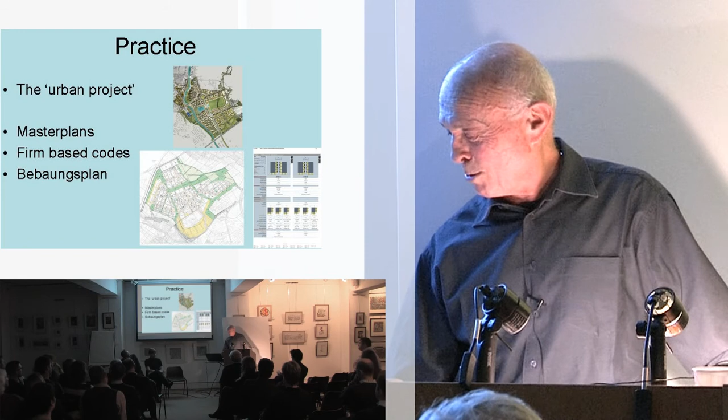But the way it works, what the urban designers do, it can be new cities—huge in the case of China, or very small in other cases. In China they're designing cities for 3 million people. Or urban extensions, as is the case in a lot of European countries, or regeneration, as is mostly the case here. Urban extensions here as well, but in most cases they are housing development, housing estates.

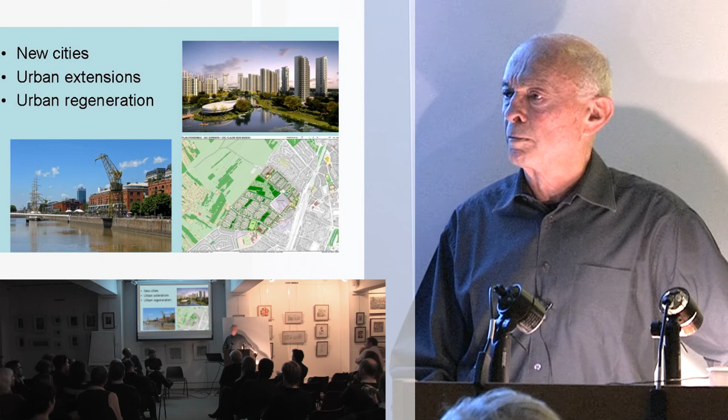So who are the clients of these schemes? That's quite interesting. In a lot of countries the client is international firms, and that applies to the Middle East, to Egypt, to Morocco, to China in some cases, India as well. Outside of Europe, certainly in South America, a lot of countries, it's international firms that want to develop huge developments, or large developments anyway. And they employ international urban designers, and they employ perhaps some of you—you get jobs in a number of countries, mostly in the Middle or Far East.

Then there's the local authorities. The local authorities mostly employ local people, but some do also invite through competitions, invite people from abroad. Certainly in Europe, because of European law, any tender has to be open to anybody in Europe. So you can get jobs from local authorities that have been advertised and have been obtained by British firms, as I know a few examples.

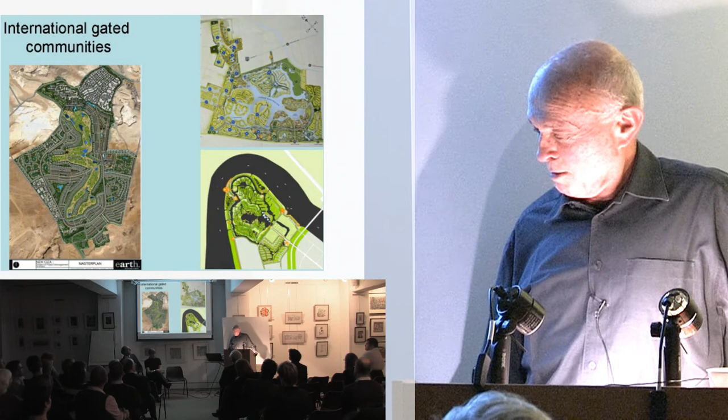But you have to ask yourselves whether that's the future, from all sorts of points of view.

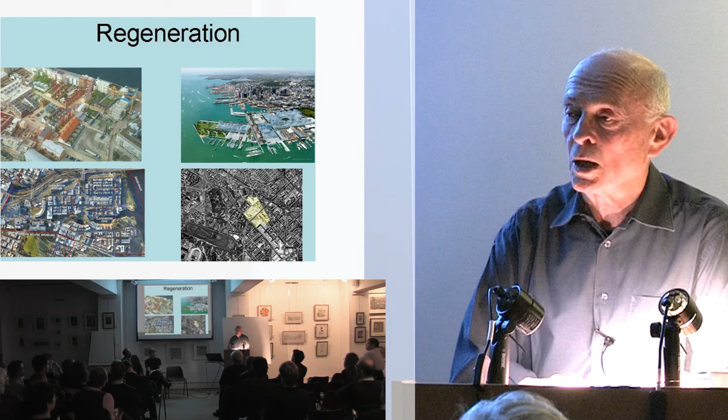Another type of scheme that is quite ubiquitous and also can be similar, though there are more differences I think, are the schemes for regeneration—regeneration of docks very often, or industrial wasteland basically. They again can be done either by local firms or by international ones, quite often international ones through competitions. And one thing attached to a lot of these is branding. That's another thing you will see—quite a few cities have big urban design schemes, mostly regeneration, not urban extension, and rarely new cities, because they want to rebrand themselves.

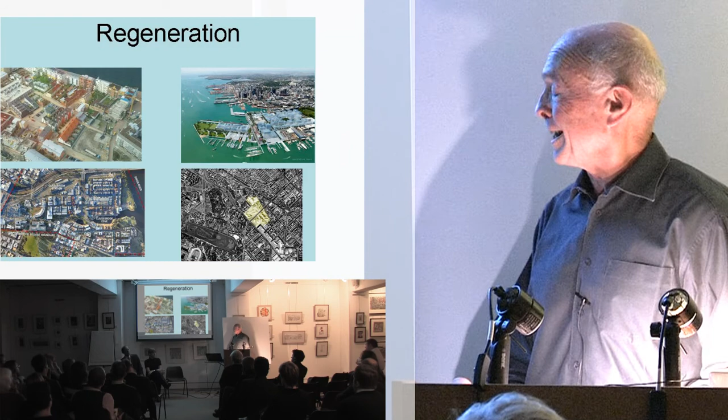That was the case with Malmö up there. It was the case with Amsterdam—no, Rotterdam, sorry. It's the case of New Zealand and Australia down there as well. This is a scheme in Milan, and that was not just for branding; it was genuine regeneration of an industrial part of Milan. But I think there's a strong correlation between the work of urban designers in regeneration and branding.

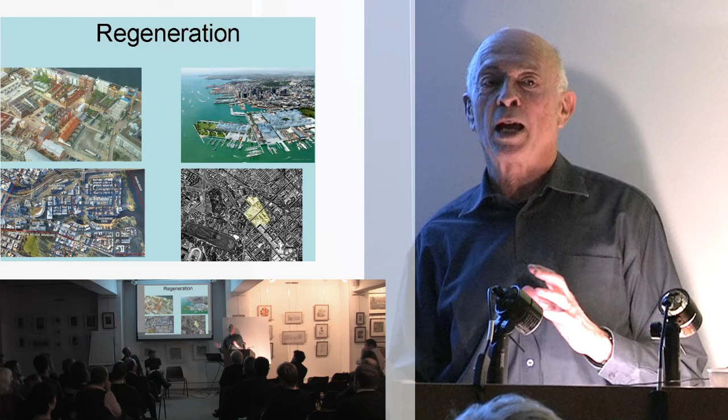Okay, the third one is urban extensions, and that's also all over the world, I would say, although perhaps more in America and Europe than in other countries. So here we have France, Spain, and Germany—three examples of urban extensions.

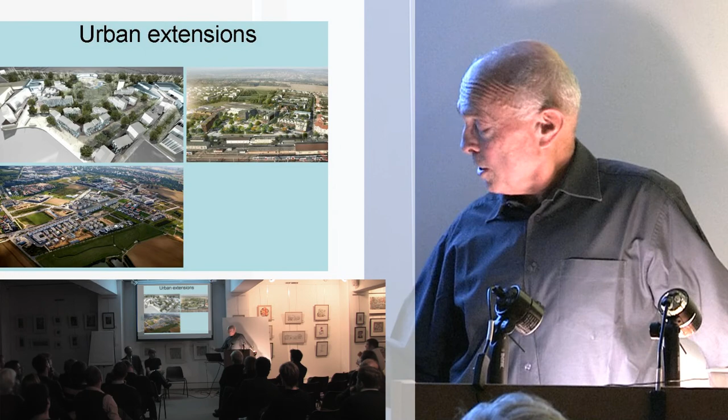I would say a few more words on the form in a minute, but what a few of my contributors, particularly in the developing world or emerging countries, ask is: where are the Indians? Where's the local population? How are they involved in this? And the truth is that very often they're not, and the whole thing bypasses them completely.

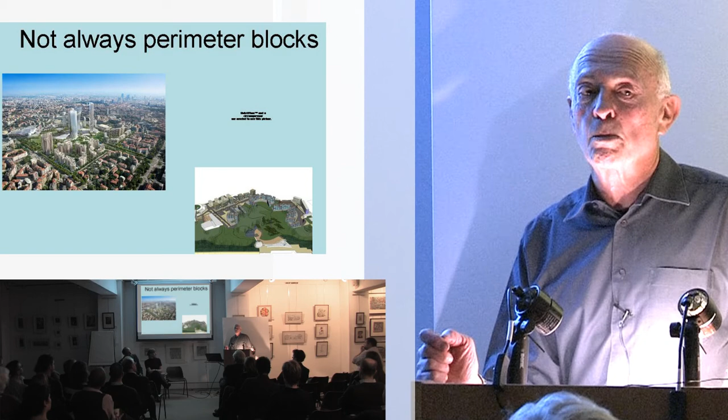You have things in some countries that don't follow the perimeter block at all, and don't necessarily understand this concept of permeability and legibility in the same way as we do. Particularly, they have a different idea about private and public space, which in Anglo-Saxon countries is something very, very protected and very distinctive. In Spain and Italy, not at all. That's highly influenced by modernism still, and this is a completely different approach to an urban extension than what we would have.

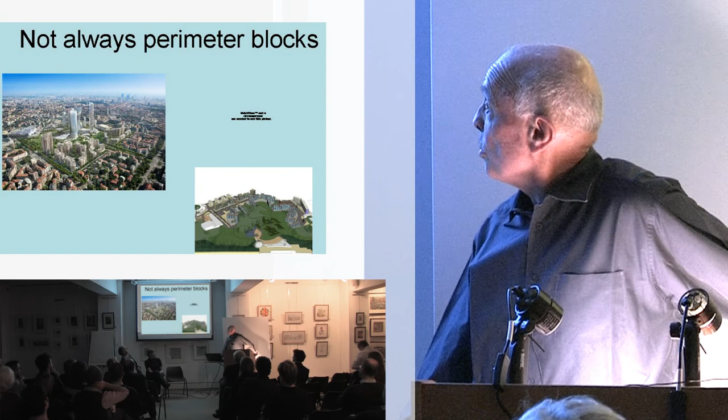And I can't remember what the other one was, but again, it wasn't a similar pattern to ours. So not everybody follows the same models.

And finally, we also rely very much on heritage, and some countries, of course, do too. There's a whole question of integration of new and old. Which in some countries is still very strong, and in others it's not strong at all. Chinese don't give a damn about old buildings — they will build old buildings new, but they won't necessarily preserve old ones. They'll have a new quarter which is old, but has been built yesterday. The Indians have other problems, and basically they're not very strong on heritage either, and a number of other countries follow the same pattern. In fact, emerging countries are less worried about their heritage than old European countries.

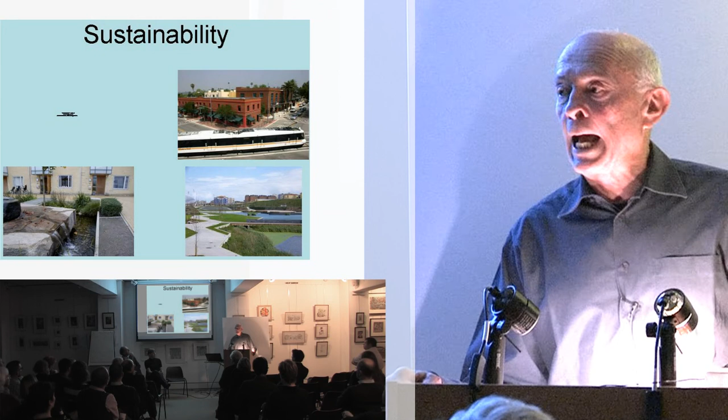So I think one more element: I also asked what these various countries did about sustainability. And again, it's very uneven. As you'd expect, northern countries, Nordic countries, North European countries are pretty strong on sustainability, others much less, and the emerging countries even less.

Interestingly, that image there is from America, and the fact that you have a piece of public transport outside New York City is quite miraculous. But there are occasional cases when they are trying to introduce other forms of transport. That is, I think, in terms of the future, one area where there's more work to do than anything else — sustainability, everywhere, basically.

So the future is complicated, I would say, but the future is there. And I'll stop here, and I'll ask Katja to say a few words about Germany. I think there you are.